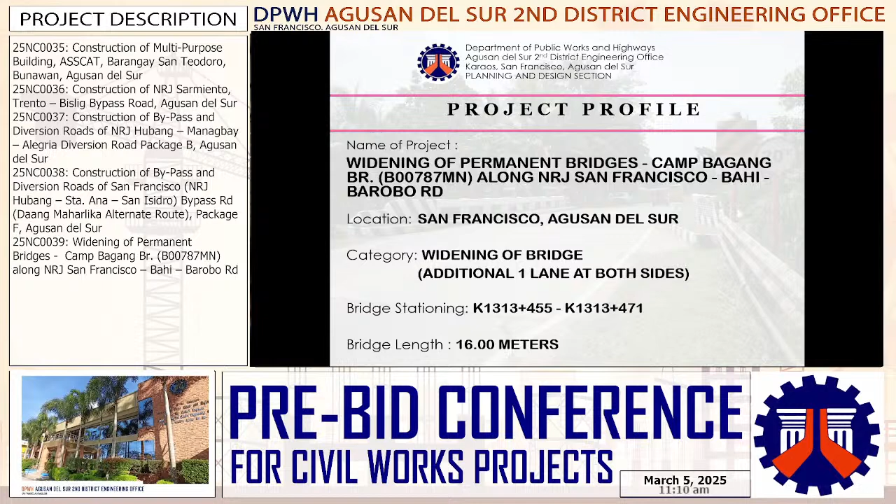Engineer Himo: Good morning, everyone. So our first project under pre-bid is the widening of permanent bridges, Camp Bagang Bridge, B00787MN along NRJ San Francisco Bahi Barobo Road, located at San Francisco, Agusan del Sur, under the category of widening of bridge, additional one lane at both sides. For the bridge stationing, we have kilometer 1313 plus 455 to kilometer 1313 plus 471, bridge length of 16 meters.

For the type of bridge, reinforced concrete deck girder or RCDG, number of span 1. Appropriation is 23,500,000 pesos. This is composed of CW, widening of bridge 23 million, and RROW of 500,000 pesos. ABC of 22,530,000 pesos, and a project duration of 219 calendar days.

So for the bridge profile of Bagang Bridge, it was constructed in year 1981, and it was repaired and rehabilitated in year 2014 under maintenance funds. So years in service for the Bagang Bridge is 44 years.

For the location map, this is the Bagang Bridge. This direction is going to Barobo, and this direction is going to SF Rotonda, this is the SF Rotonda. So for the geotag photos or actual photos on site, this is the beginning of the project and the end of the project.

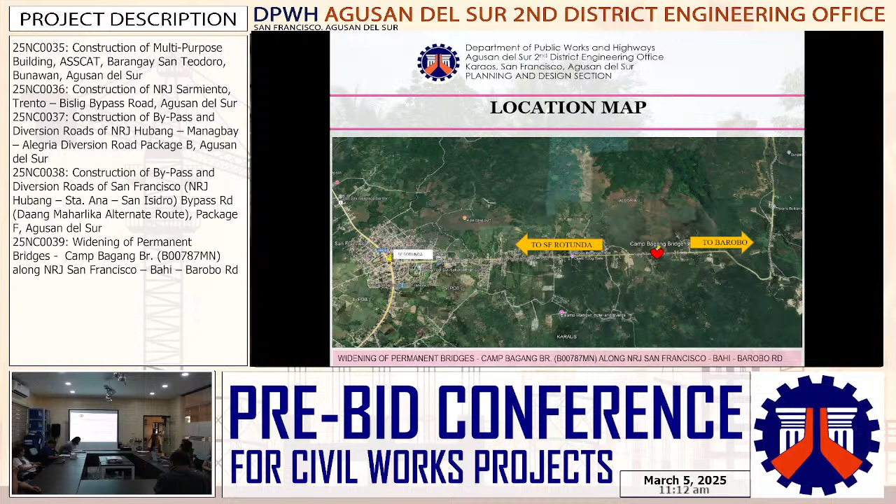For the closer look at the general plan, we have the existing bridge and our widening at both sides. Under the bridge, we have the RC bank protection with pile cap and steel sheet pile, SSP length of 3 meters, distance covered of 4.8 meters per abutment. The remaining arc length is RC bank protection with footing, dimension of 1 by 0.4, distance covered of 11.2, for abutment A and abutment B, and also the same for the upstream portion.

For the general elevation, we have our RCDG, 16 meters in length, girder height of 1.1 meters. We have the bottom of girder elevation, and our freeboard is 1.4.

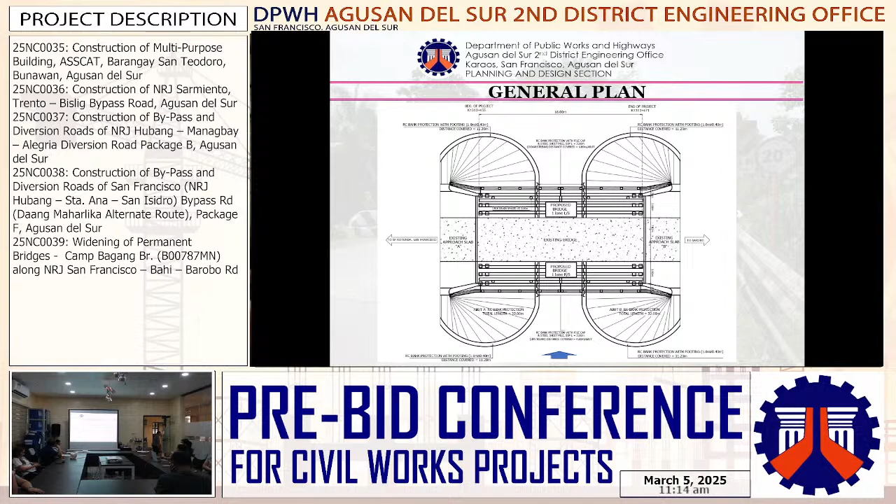For abutment A, we have to drive RC piles, 400 by 400, length of pile is 18 meters. Number of piles to be driven is 12 pieces, 6 pieces at each side, with allowable axial capacity of 831 kilonewton.

For abutment B, another 400 by 400 RC piles, length of 16 meters. Number of piles to be driven is 12 pieces, with allowable axial capacity of 1,519 kilonewton. This is based on the soil exploration result.

Under the bridge, we have the RC bank protection and pile cap, and also the steel sheet pile, length of 3 meters, distance covered of 9.6, for abutment A and also for abutment B.

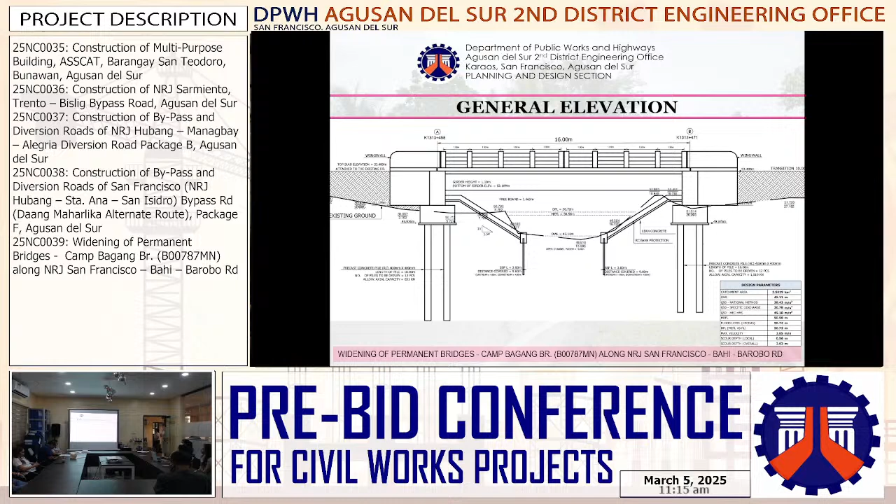For the typical cross-section of the bridge, we have the existing bridge of 7.32 and our widening of 3.66, and our sidewalk of 1.2. Total bridge width overall is 17.04 meters.

For the type of superstructure, span is 16 meters, girder type RCDG, girder depth or height of our girder is 1.1, and girder spacing of 1.45.

For the typical cross-section of bridge at approach slab, this is our existing bridge and existing abutment with a height of 2.391 meters from our previous standard. We have now the new standard height of 3.5 based on the new standard RCDG plan downloadable on the DPWH website, released last March 2019.

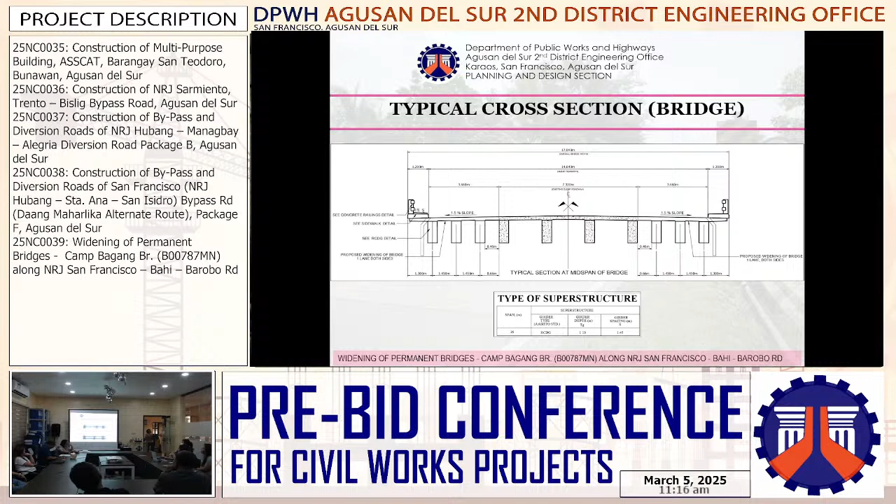For the superstructure detail, this is the orientation. Again, this is our existing RCDG bridge and widening at both sides.

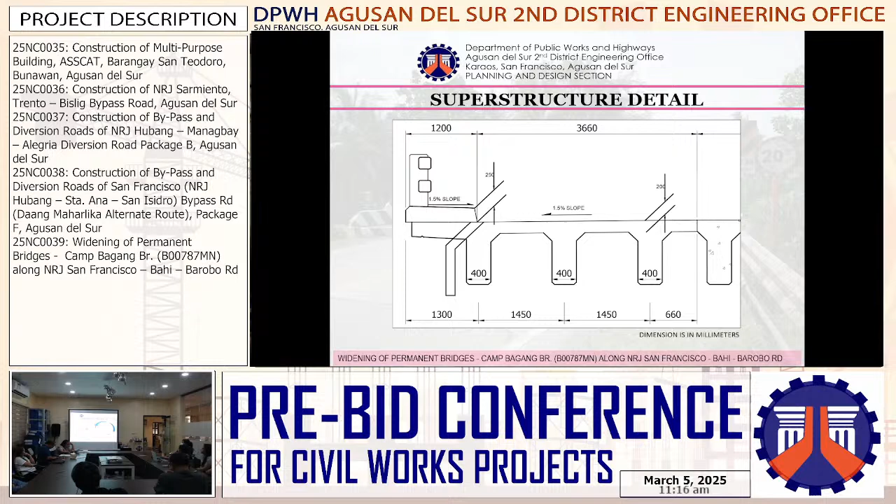For our connection, this is the existing bridge and this is our proposed widening. We'll have the groove and the expansion joint. For the longitudinal expansion, we have the angular steel with cover, and for the transverse expansion joint, we have the steel finger type.

For the expansion joint, our transverse will be the steel finger type with total length of 14.64 linear meters. For our longitudinal joint connection, we have angular steel with cover, total quantity of 1,032.24 kilograms.

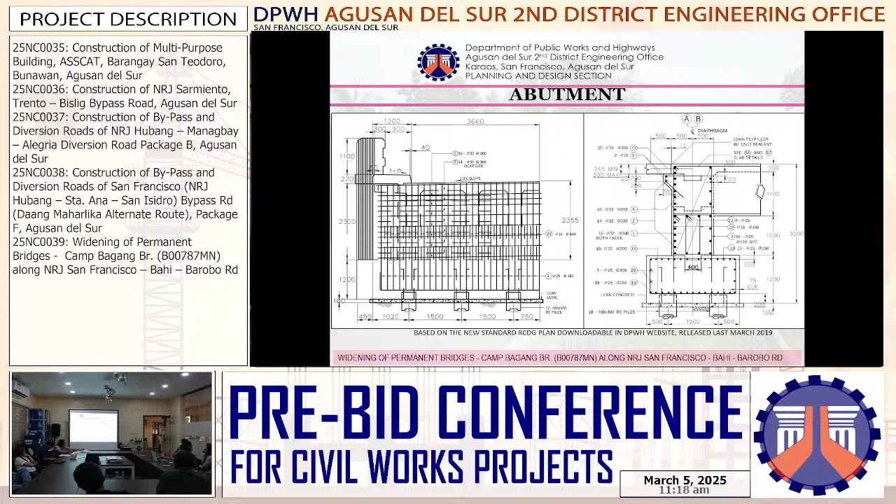For the steel sheet pile, length of 3 meters, distance covered of 9.6 per abutment. For the structural concrete, we have lean concrete 0.10 meter thick, and our reinforced concrete is 0.3 meter thick. Our steel sheet pile is FSP type 2 with section modulus of 876.

For the remaining arc length of our bank protection, it's the same, aside from the pile cap. Instead of the pile cap, we will replace it with footing, RC footing with dimension of 1 by 0.4.

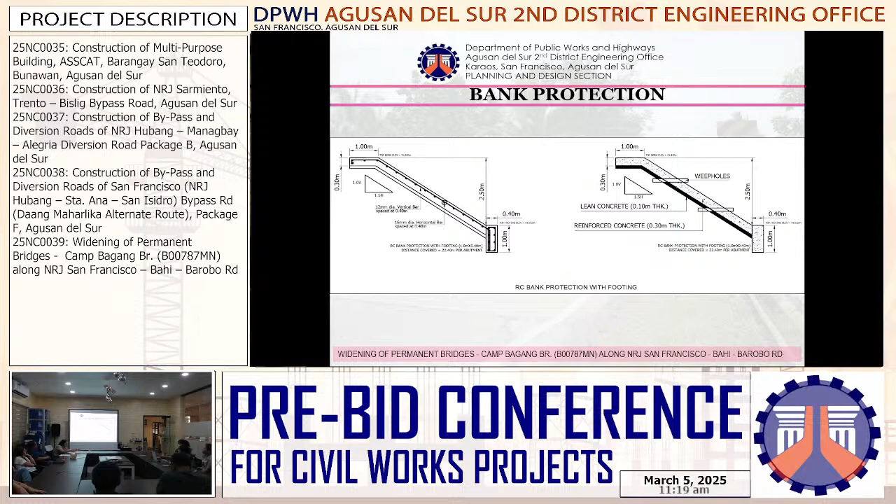So for the traffic management system, this is the orientation. This is based on the actual scheme on site. Originally, this is from Layout 7, Case 2, under DO 13 Series of 2018.

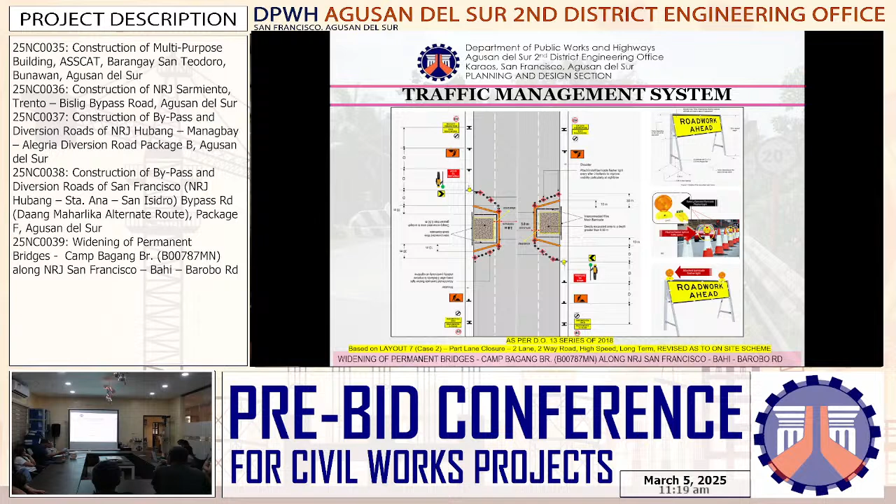For the program of work: facilities for the engineer and the bunk house, 1 lump sum. For the bridge survey and staking, 1 lump sum. For the project billboard signboard, 4 each. Occupational safety and health program, 1 lump sum. Traffic management, 1 lump sum. Move and demove, 1 lump sum.

For the earthworks, we have clearing and grubbing, 0.005 hectares. Removal of existing structures and obstructions. This is for the existing concrete to be removed, 39.38 cubic meters.

For the structure excavation, common soil, we have 102.2 cubic meters. For the embankment from borrow, common soil, we have 458.55 cubic meters. For item 200, we have 16 cubic meters, this is under the approach slab. And for our Portland cement concrete pavement, reinforced, 0.3 meter thick, for our new approach slabs, we have 80 square meters.

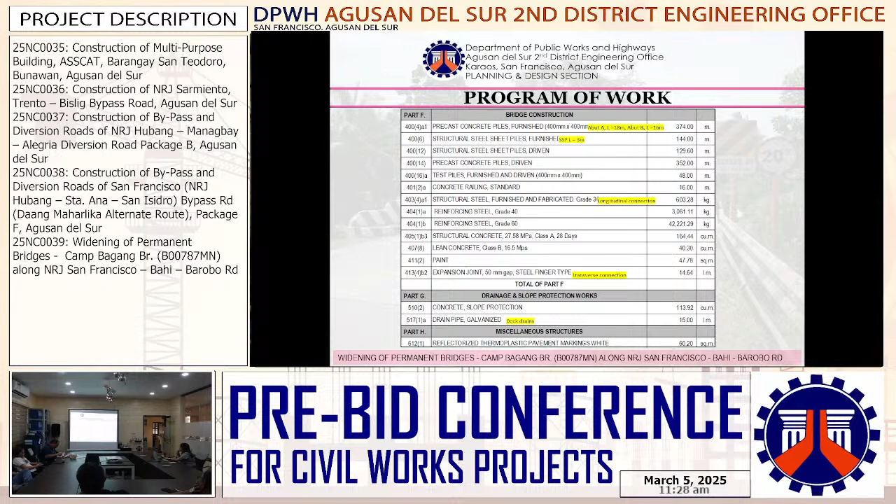So for the quarry sources, our embankment will be 5-kilometer radius away from our project site. Our item 200 is from Lapinigan, San Francisco, Agusan del Sur, with hauling distance of 18 kilometers.

Our sand will be from Patrocinio, Santa Josefa, Agusan del Sur, with hauling distance of 74 kilometers away from our project site. And our gravel, crushed, is from San Roque, Simulao River, Trento, Agusan del Sur, with hauling distance of 84 kilometers away from our project site.

For the minimum equipment requirement, we have bulldozer, 1 unit. For the dump truck, 2 units. For the payloader, backhoe with breaker, plate compactor, water truck, vibratory roller, we have 1 unit each.

For the transit mixer, 2 units. Concrete vibrator, 2 units. Concrete screeder, diesel hammer, drop hammer, 1 unit. And for the jackhammer, 2 units.

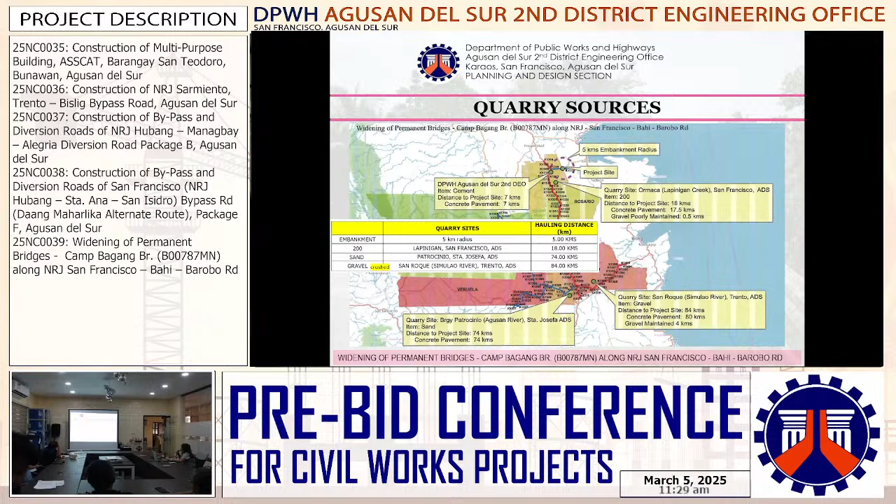For the cargo truck, 1 unit. For the truck mounted crane, kneading machine, applicator machine, motorized road grader, service crane, crawler crane with bucket, 1 bagger mixer, grout mixer, and vibro hammer, 1 unit. That's all, sir, for the widening of Bagang Bridge.

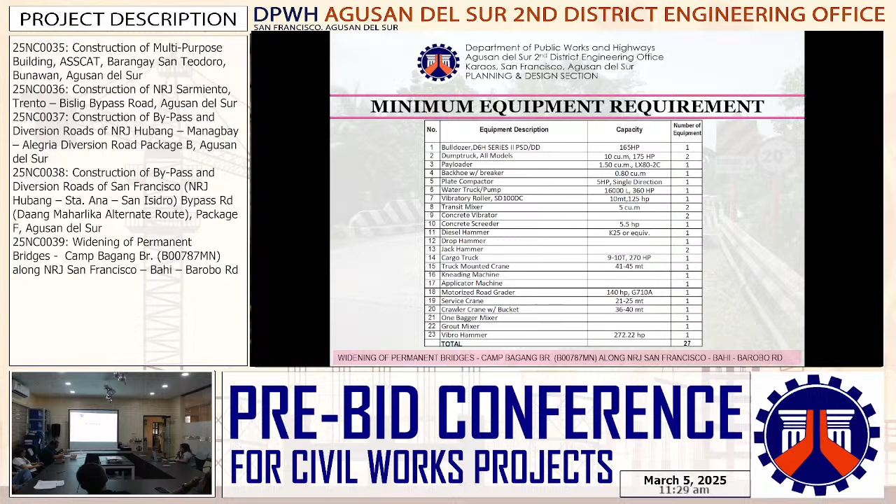We'll take questions or clarifications from the contractors or bidders present this morning regarding the presentation. If there's none, we'll proceed to the next project.

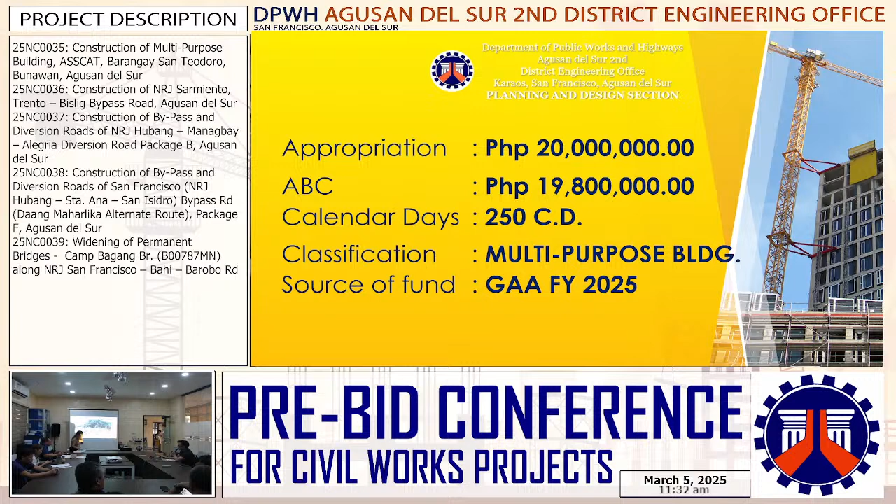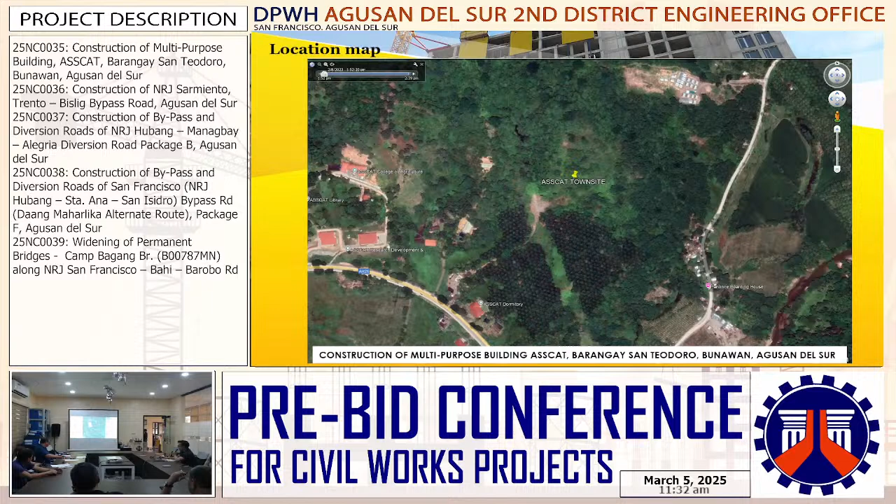And this is the proposed project location for the building.

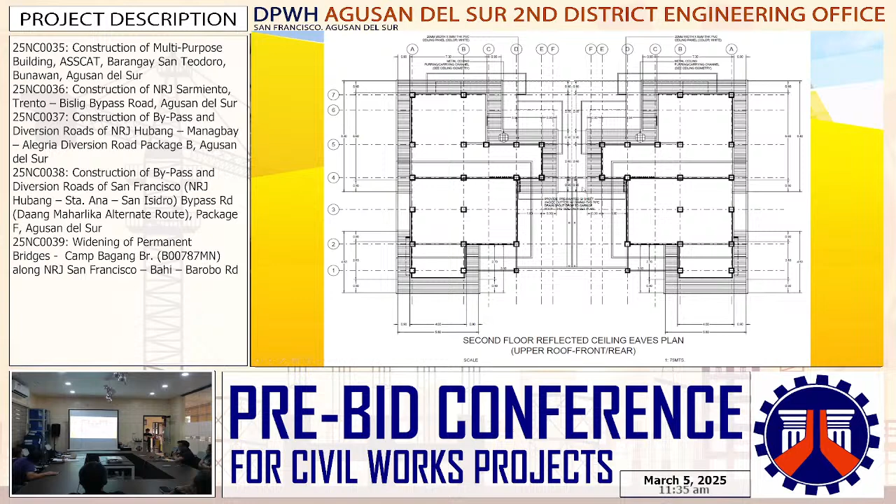This is the ceiling section for the cove ceiling and drop ceiling. And we also have a front elevation na nagamit og outdoor wall deco stone, finished ledgestone, textured surface, as well as aluminum cladding panels para sa patios and covered terrace.

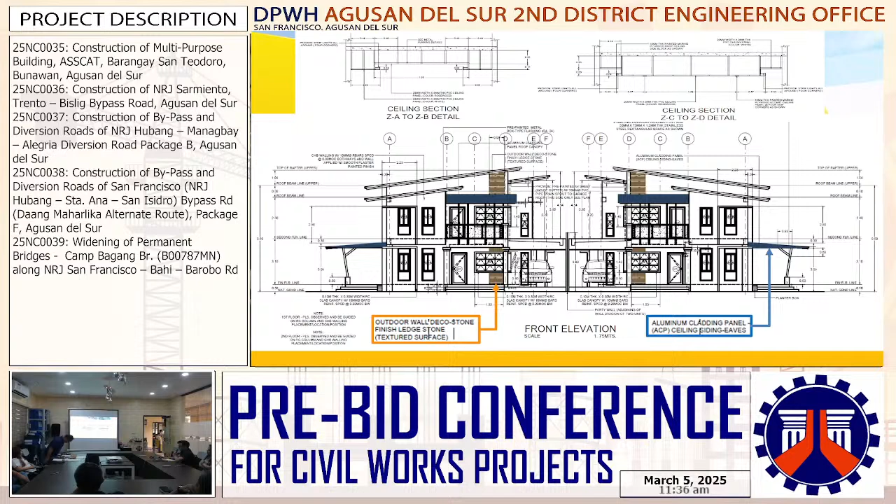For the right side elevation, aluminum cladding panels, ACP, ceiling siding eaves, and 25 mm thick wall-mounted U-groove RC molding, so plaster lang siya, plaster painted finish. For the cross-section details and longitudinal section details.

For the railings, we'll be using stainless steel na 304 for post, hand railings, and for the balusters. So different different sizes, but we will be using a stainless steel na grade 304.

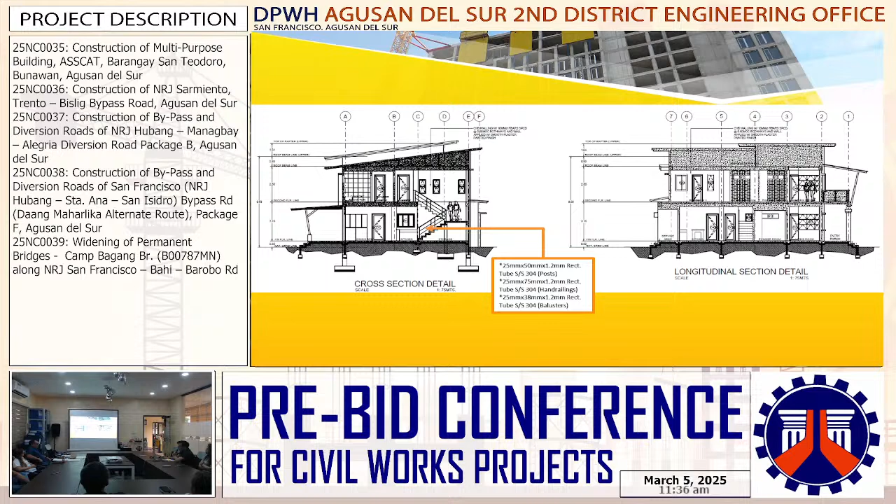For the left side elevation and the right side elevation, at right side elevation, deco stone and wall-mounted U-groove. For the left side, WPC fluted wall panels, finish color charcoal.

And for the roofing, we will be using a pre-painted metal sheet, rib type long span roofing above 0.47 mm, as well as a box type gutter gauge 24.

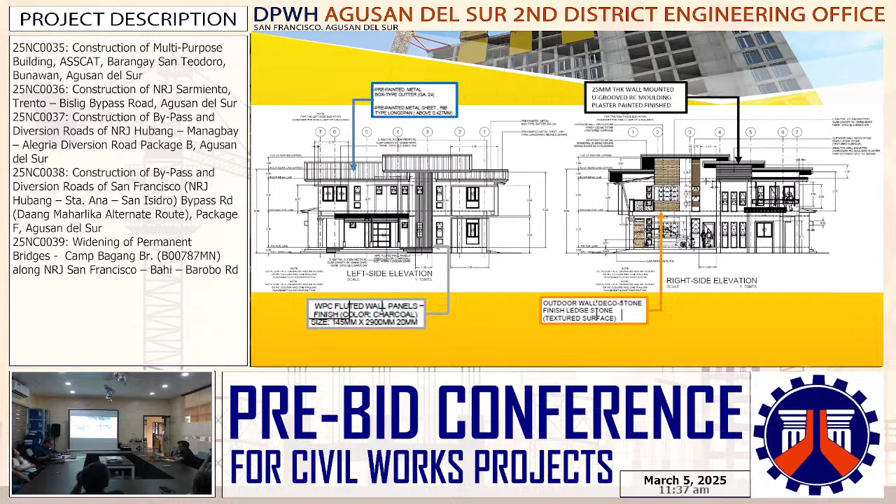For the roofing plan, same pre-painted metal sheet, rib type long span roofing, and in the mga sections sa roof. And we also have details for our modular wardrobe cabinets, additional detail, and as well as blow-up sections for our comfort rooms.

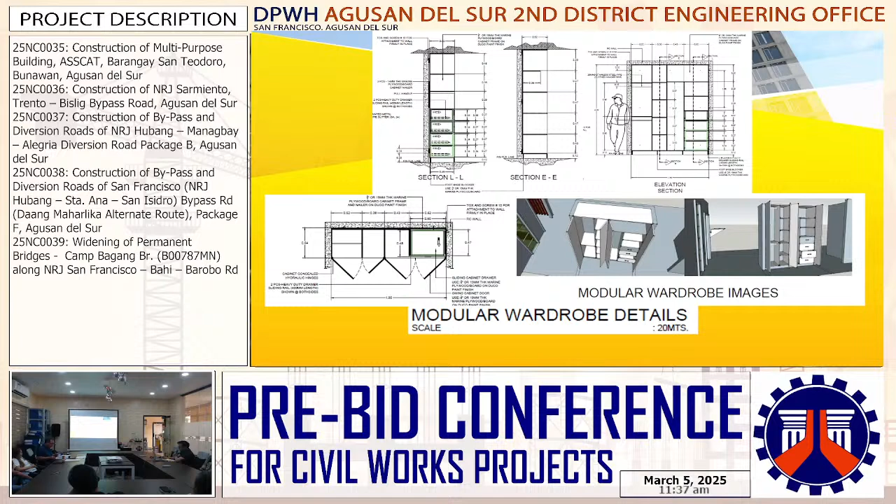Ground floor roof framing plan. We also have details for our ceilings and truss para sa carport. This is the second floor roof framing plan. Pre-painted metal sheet, long span, and then sa second floor, nagamit po tayo aluminum cladding para sa covered terrace.

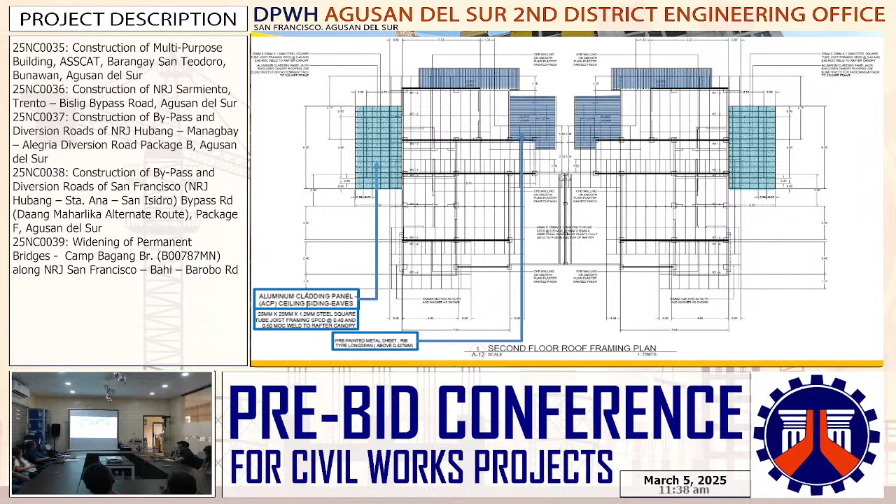This is the trusses. So we'll be using a double na 75 mm by 75 mm by 8 mm thick para sa top chord and bottom chord, and sa members is 50 mm by 50 mm by 3.5 mm thick. For the gusset plate, we'll be also using a 6 mm thick gusset plate.

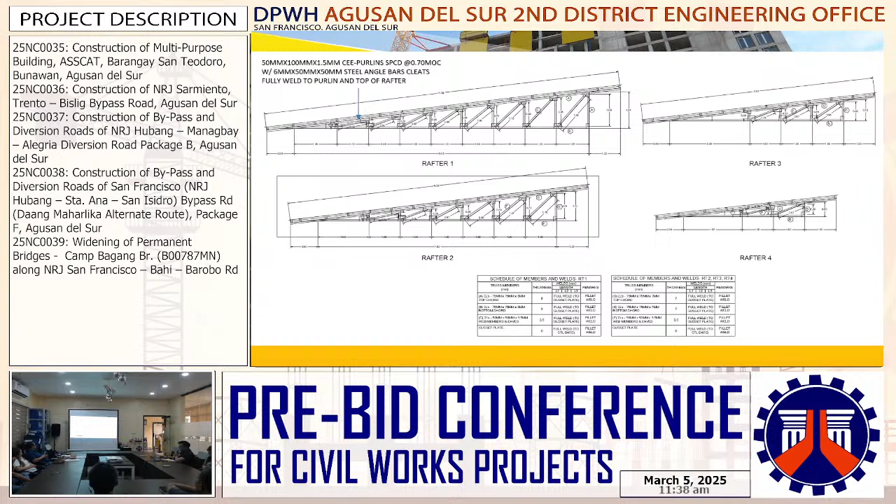And for purlins, 50 mm by 100 mm by 1.5 mm C purlins spaced as 0.7 meters at centers with 6 mm by 50 mm by 50 mm angle bars for cleats, fully welded to purlins and top of rafter. As well as different details para sa covered patios, for our rafters and fascia frames, and details for our covered terrace A na railings sa gawas and terrace B.

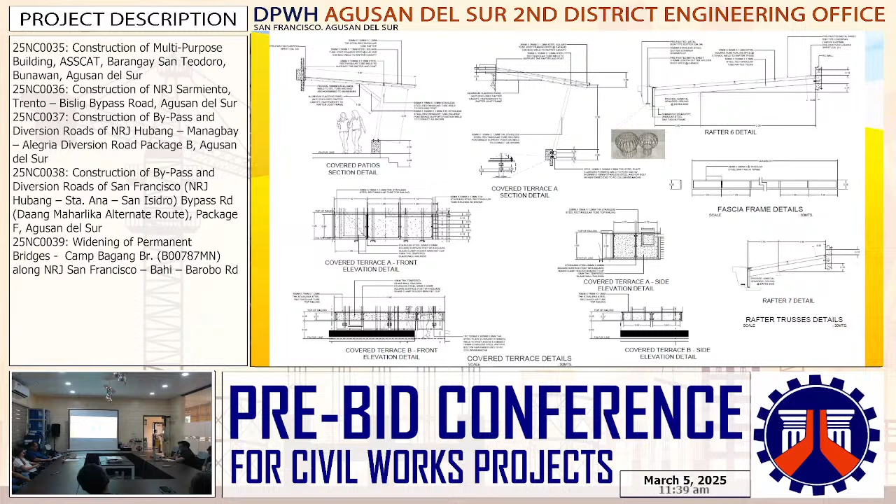Roofing plan for our carport. Same, we'll be also using a pre-painted metal sheet na red type roofing. And for the second floor roof framing plan is an aluminum cladding panel.

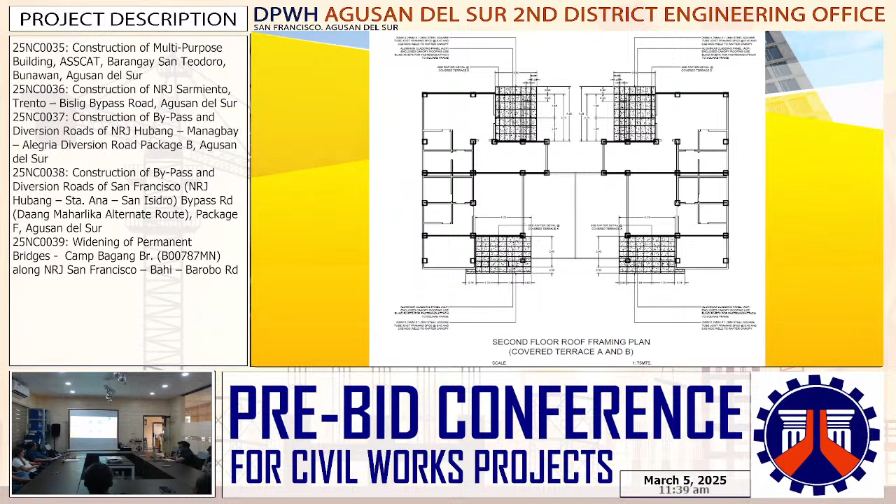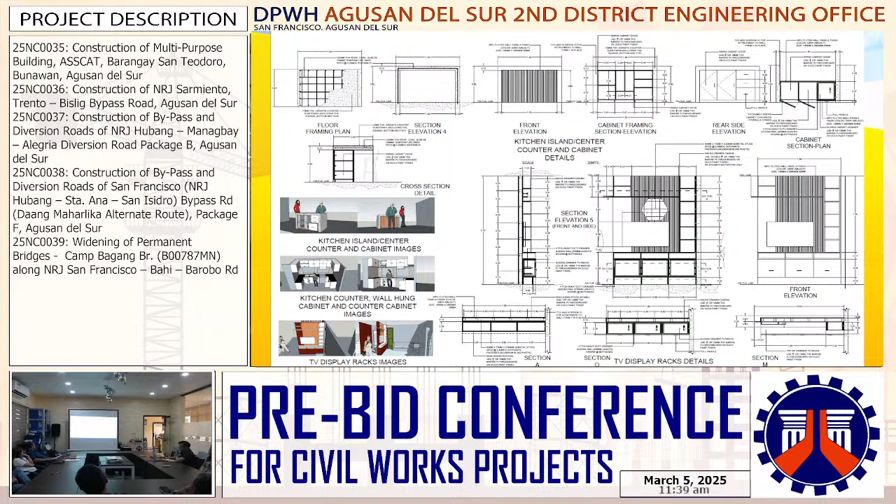And there are also different schedules para sa doors and windows and additional details. And atong schedule po para sa columns, as well as the elevations of each column, second floor roof beam layout, as well as ilang mga schedules. For the footing tie beam layout, with their corresponding schedules, and para sa stairs.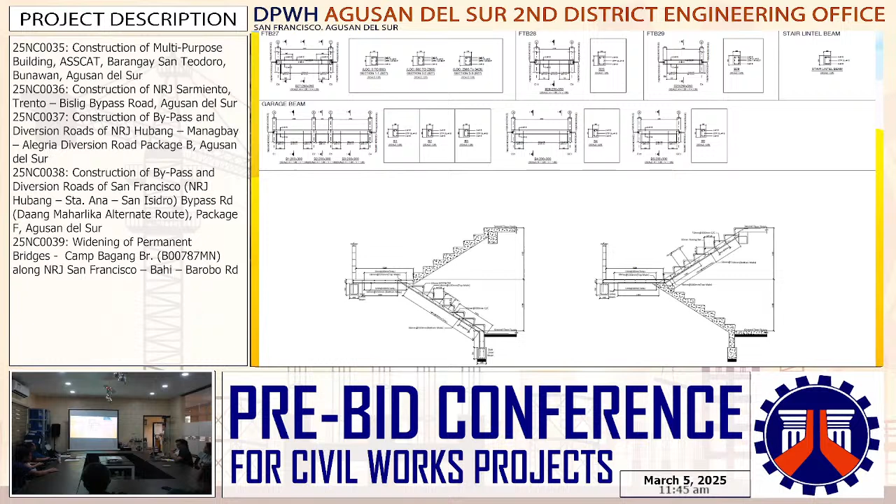So this is the roof beam layout plan as well as their schedules. For the foundation plan,

we updated the initial data we got from ASSCAT, and sadly, our foundations also increased. So last time, our program of works included the old water system, water pumping system, but

due to the changes, that item has been omitted. For this typical column and footing details with isolated footing, we have 2.15 by 2.15 by 0.3, reinforced with 12, 16mm diameter bars both ways, up to isolated footing 6,

with their corresponding reinforcements. We also have footings for the pedestal footings on our patios and concrete gutter details. Aside from the isolated footing, we also have combined footing where columns are close together.

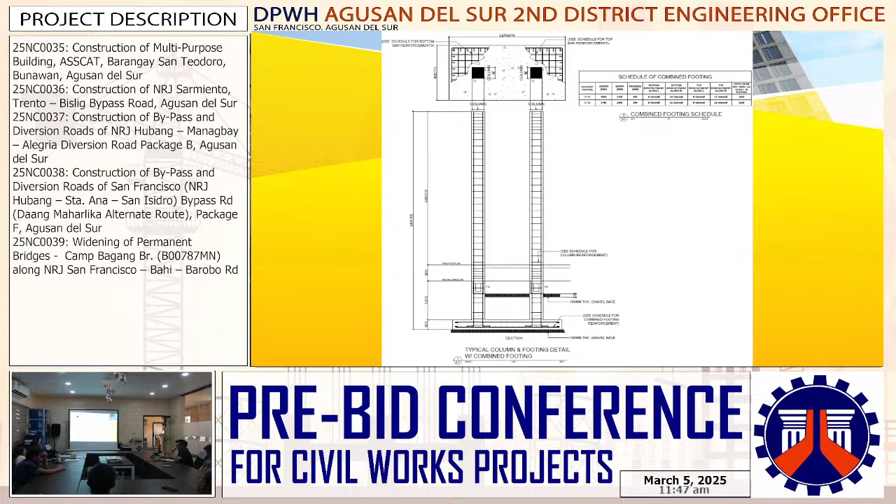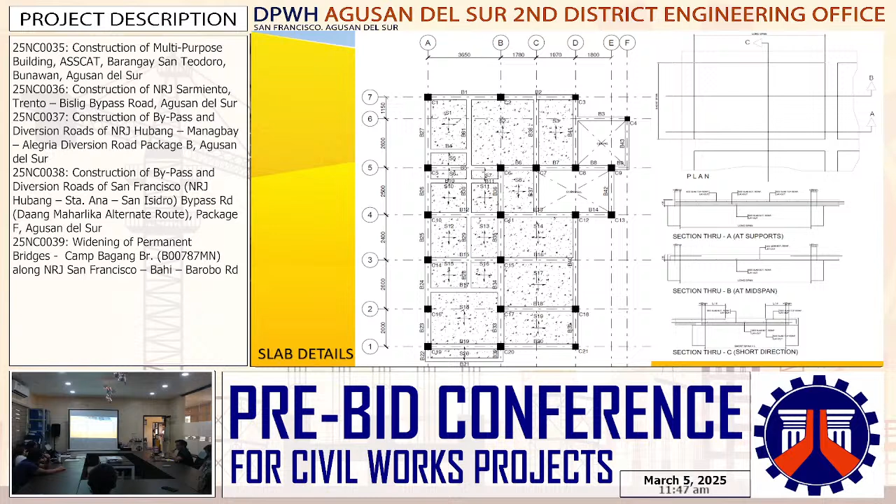These are also the slab details as well as the sections and their corresponding schedules. This is a typical detail for our billboard.

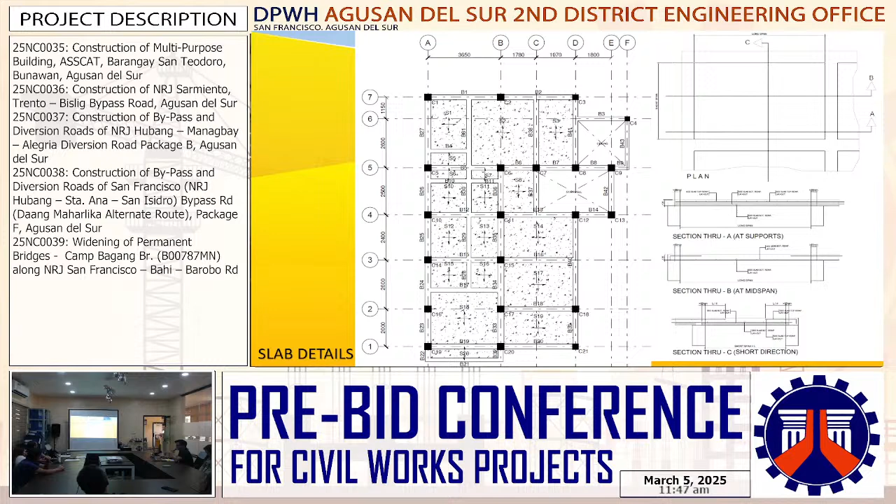And let's proceed with the program of works. Permit and clearances, 1 lump sum. Project billboard and signboard, 2 each. Occupational safety and health as well as mobilization and demobilization, 1 lump sum.

For the earthworks, clearing and grubbing, 414 square meters. For structural excavation common soil, 372 cubic meters. For the embankment from roadway or structure excavation, 234 cubic meters. Gravel fill, 59 cubic meters.

Reinforced concrete, structural concrete, class A, 28 days, 217.8 cubic meters. For the reinforcing steel deformed grade 40, 31,422.77 kilograms. Formworks and falseworks,

829.03 square meters. For the finishings and other civil works, concrete gutter, 13.6 meters. Sewer line works, storm drainage and downspout, septic vault, plumbing works and cold water lines, 1 lump sum.

For the pre-painted metal panel on metal frame ceiling, 163.38 square meters. Carpentry and joinery works as well as finishing hardware, 1 lump sum.

Aluminum frame glass doors, sliding type, 8.4 square meters. Aluminum glass windows, 1 lump sum. Frames, jambs, seals, heads, transom and mullions, 38 sets.

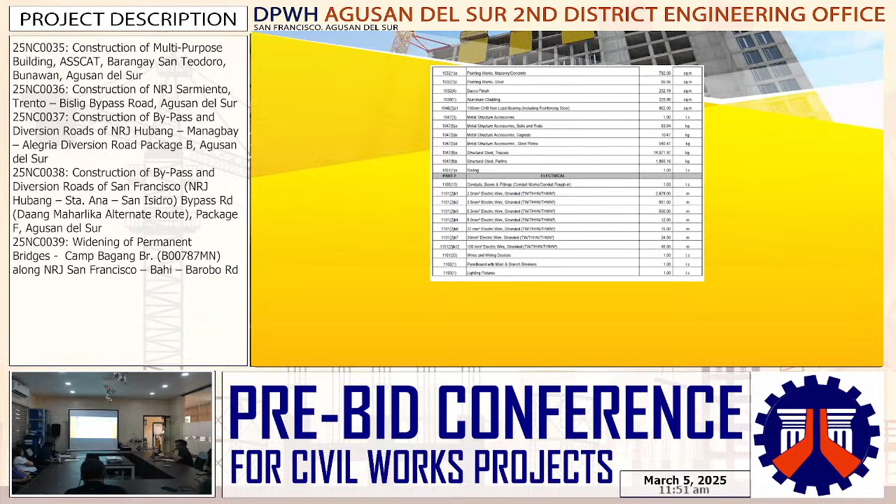For the minimum equipment requirement: plate compactor, 1 unit. Concrete vibrator, 1 unit. Bagger mixer. Bar cutter and bar bender, 1 unit. Welding machine, 2 units. Cutting outfit, 1 unit. Backhoe, 1 unit. Dump truck, 2 units.

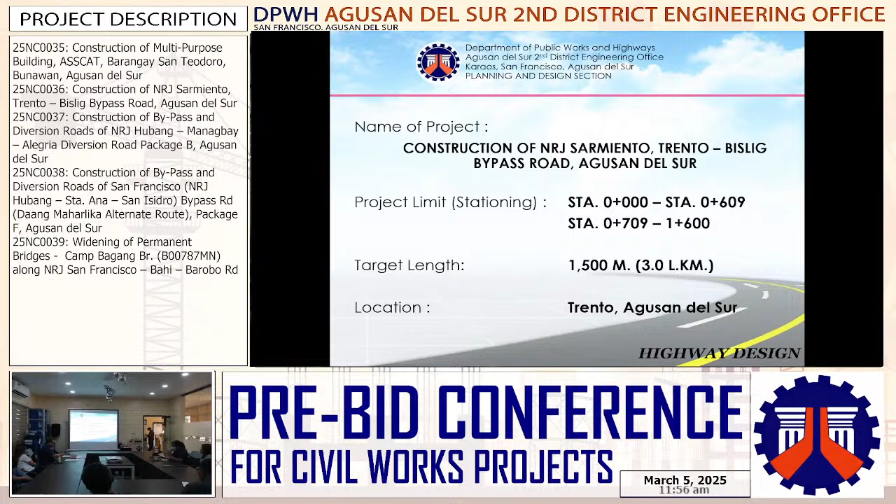Good morning everyone. This is the previous presentation for the project named Construction of NRJ Sarmiento Trento to Bislig Bypass Road, Agusan del Sur, with project limit station 0+00 to station 0+609 and station 0+709 to 1+600, with a target length of 1,500 meters or 3 linear kilometers, located at Trento, Agusan del Sur. The project has an appropriation of 50 million pesos, an ABC of 49 million pesos, a project duration of 178 calendar days, source of fund NEP 2025.

This is the location map and the geotag photos. This is the photo at station 0+00.

Before the bridge at station 0+609. After the bridge, station 0+709, and at the end, station 1+600.

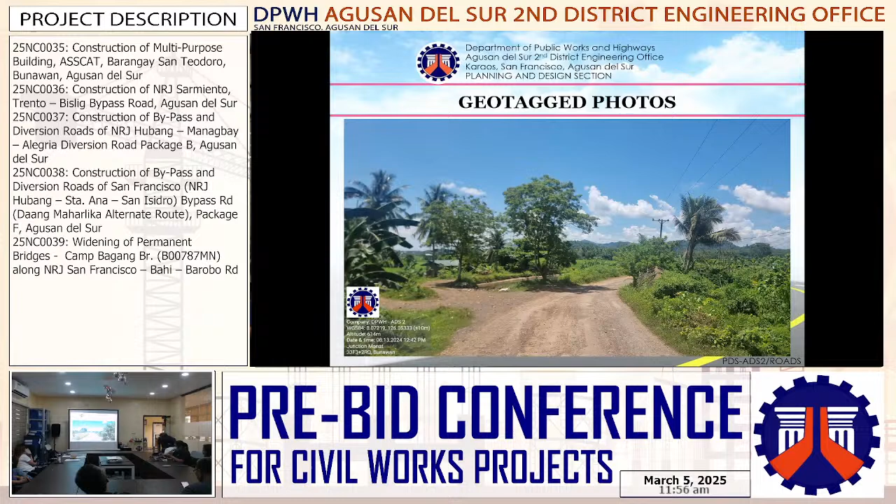For the typical section, we will provide a 1.5 meter width shoulder, 150 millimeter thick, and a 3.35 meter width for the carriageway, 0.280 meter thick. For the typical section for high embankment, same as before, but we will also provide a grouted riprap of 300 millimeter thick. We will provide a grouted riprap at station 0+080 to 0+320 and 0+440 to 0+580 right side only, and 0+709 to 0+720 both sides.

So for the topographic plan and profile, this is the TP for before the bridge, station 0+00 to station 0+609. At station 0+93.78, we will extend the existing NIA siphon, 2.4 by 2.4 by 5 meter length area RCBC.

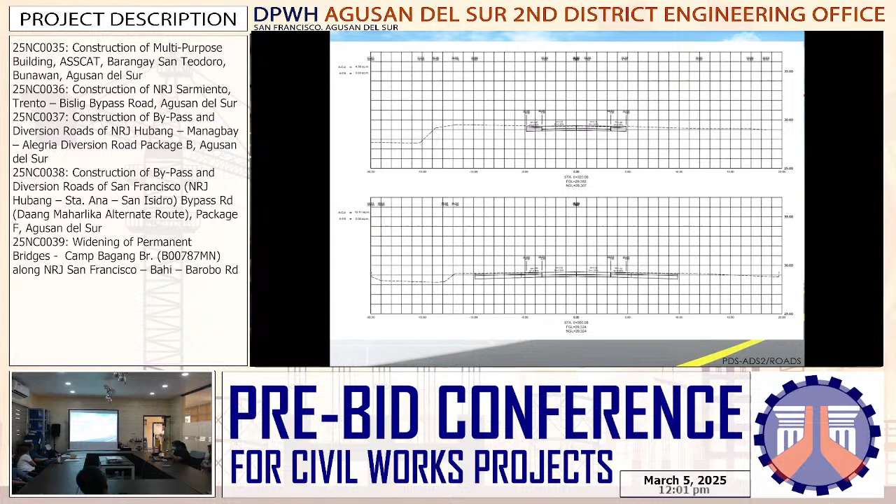For other general requirements: construction survey and staking, 1.5 kilometers. Culvert survey and staking, 5 each. Project billboard or signboard, 4 each. Occupational safety and health program, 1 lump sum. Traffic management, 1 lump sum. Mobilization and demobilization, 1 lump sum.

For the earthworks: clearing and grubbing, 2.12 hectares. Structure excavation common soil, 149.48 cubic meters. Embankment from roadway or structure excavation common soil, 2,472.02 cubic meters. Embankment from borrow, 901.77 cubic meters. And subgrade preparation.

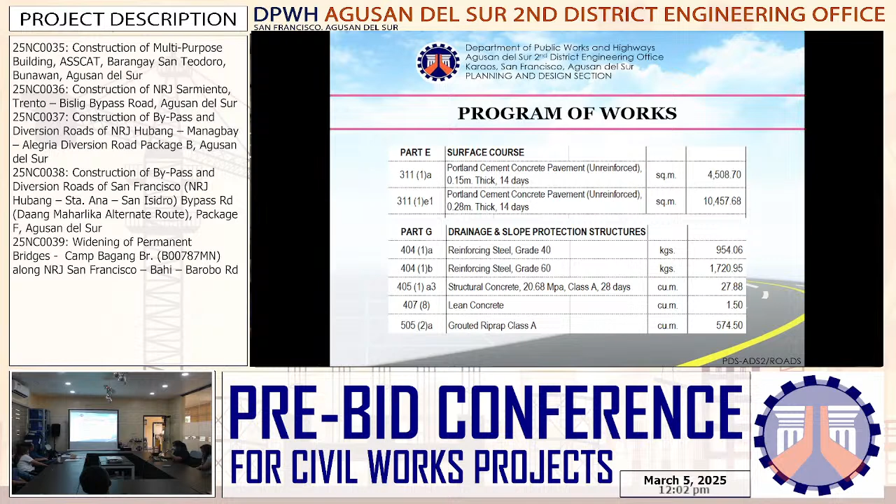18,283.13 square meters. For subbase and base course: aggregate subbase course, 4,283.18 cubic meters. For surface course: PCCP 0.15 meter thick, 4,508.70 square meters; PCCP 0.28 meter thick, 14 days, 10,457.68 square meters. For drainage and slope protection structures: reinforcing steel grade 40, 954 kilograms.

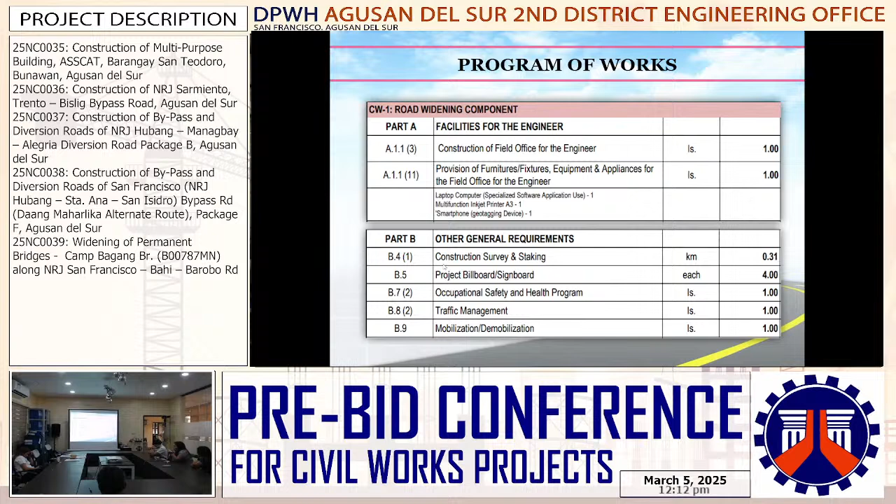And for item 200, we have 698.09 cubic meters. Still for the road widening component: gravel surface course for the fillet section, 14.27 cubic meters. PCCP unreinforced 0.15 meter thick, 799 square meters. PCCP unreinforced 0.28 meter thick, 2,077 square meters. And for the drainage and slope protection structures, for the retaining wall: reinforcing steel.

For the drainage, reinforcing steel grade 40 with 4,936.84 kilograms, structural concrete 20.68 MPa with 114.54 cubic meters, and stone masonry with 1,883.06 cubic meters. And for the miscellaneous structures for the widening component, we have reflectorized thermoplastic pavement markings, white, with 114.65 square meters.

And for the CW2 road construction component: construction survey and staking, 0.15 kilometer. Clearing and grubbing, 0.24 hectares. Embankment from roadway excavation, 17.31 cubic meters. Embankment from borrow, 436.47 cubic meters. Subgrade preparation, 134 square meters. Item 200, 196.98 cubic meters. And PCCP unreinforced 0.28 meter thick, 984.9 square meters.

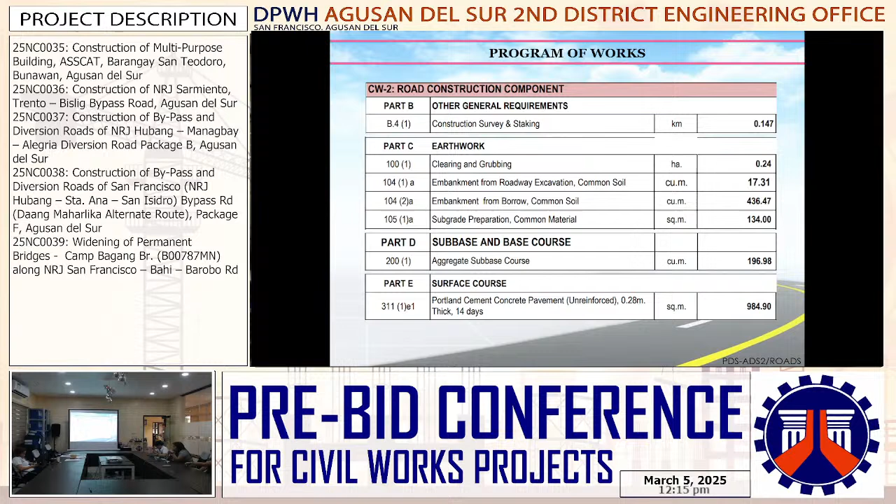So, you may proceed for the next project.

So, how are you doing?

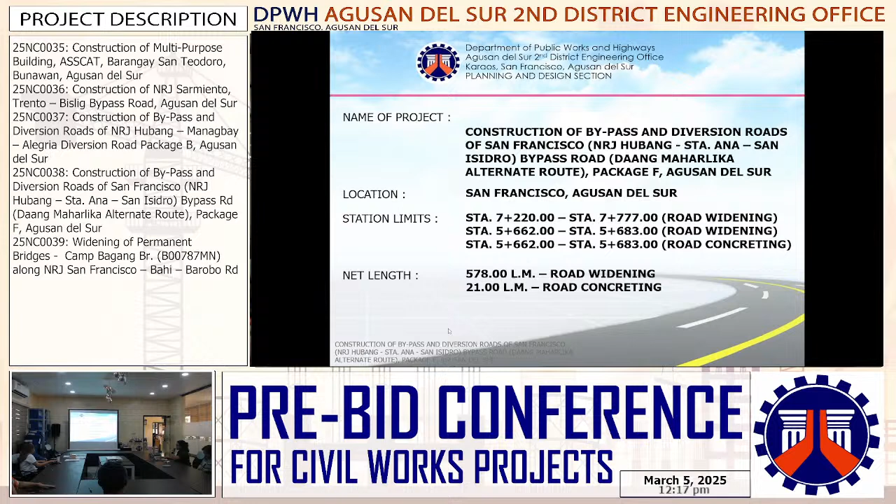Bypass and diversion roads of San Francisco NRJ Hubang to Santa Ana to San Isidro Bypass Road, Daang Maharlika alternate route, package F, Agusan del Sur at San Francisco, Agusan del Sur, with station limit 7 plus 220 to 7 plus 777 for the road widening, and another section 5 plus 662 to 5 plus 683 road widening included in road concreting, with net length 578 linear meters for the road widening and 21 linear meters for the road concreting. For the original plan and program of works, appropriation is 30 million, ABC of 28,950,000.

Calendar days to complete this project is 191. Classification: road concreting and road widening under GAA FY 2025.

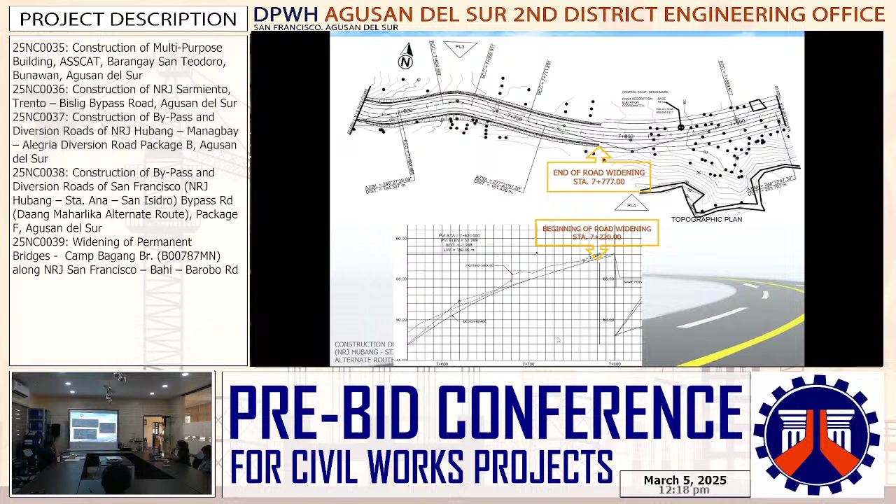So the typical section is 3.35 meter carriageway on both sides and 2 meter shoulder. Typical section for the cut section includes installation of ditch. For the fill section, provision of retaining wall on both sides using stone masonry. These are the details for the stone masonry railing and stone masonry walls.

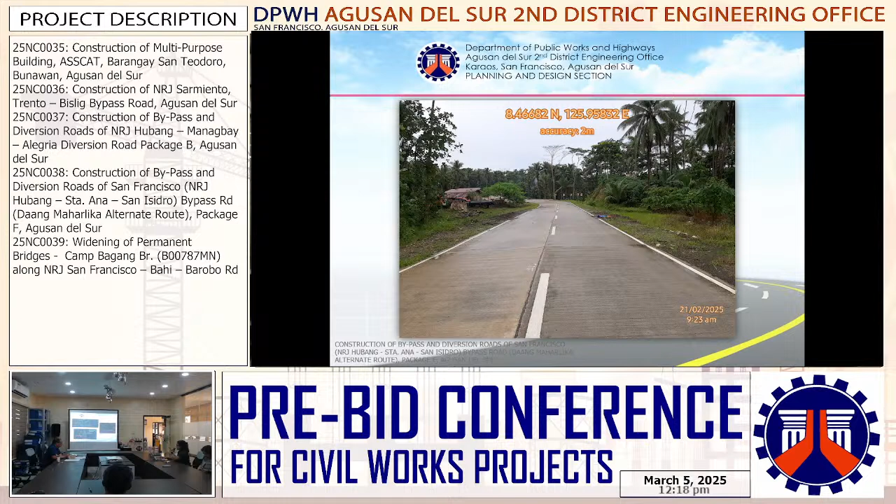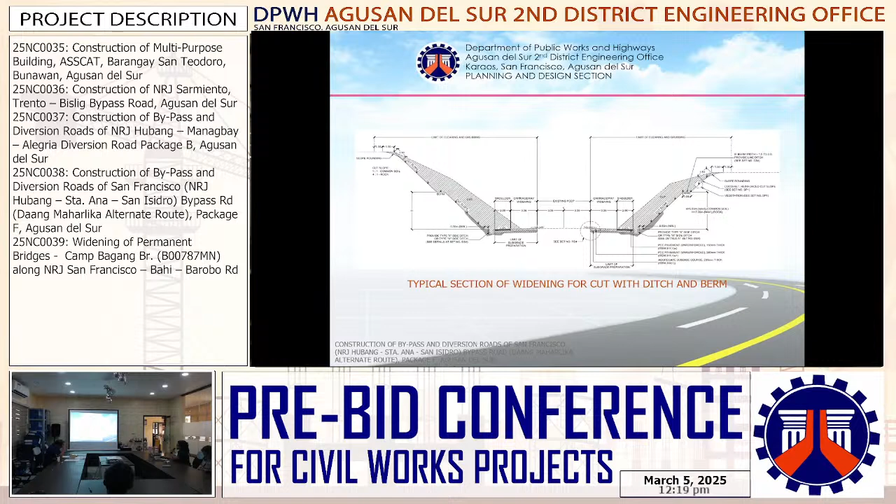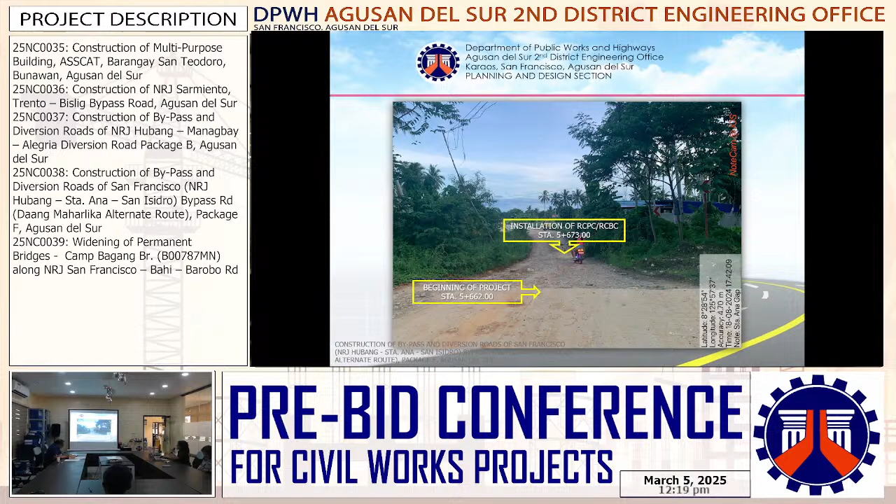For the side ditch, dimension is 600 by 700 mm. For the road concreting area, plan and profile, installation of cross drainage. For the photographs taken at the area, beginning of the road concreting, installation of RCPC, and then the end section. This photo was taken yesterday during the heavy rain to show the flow of water.

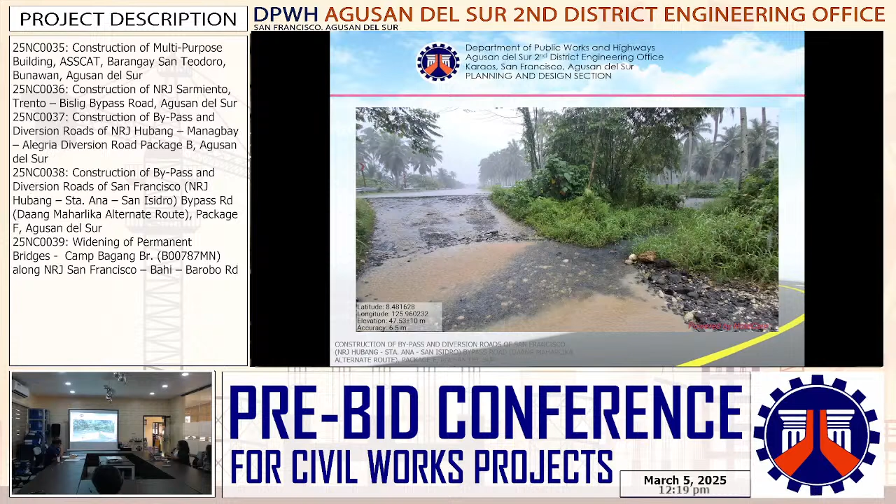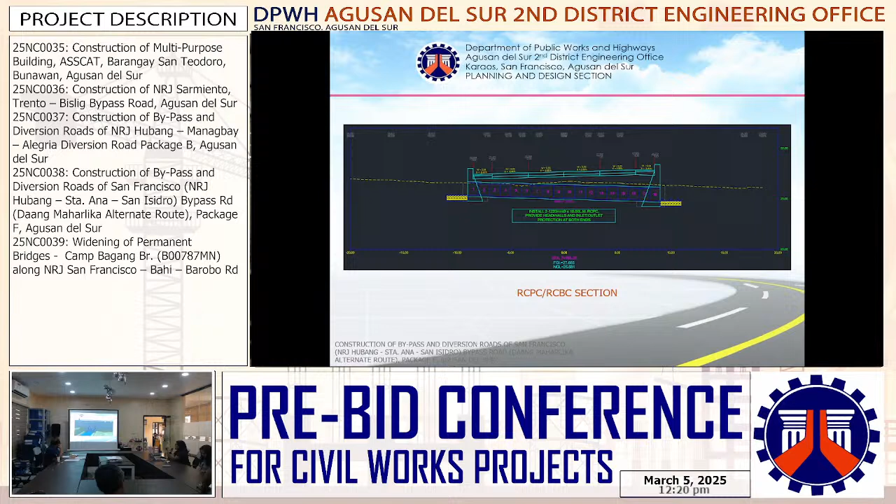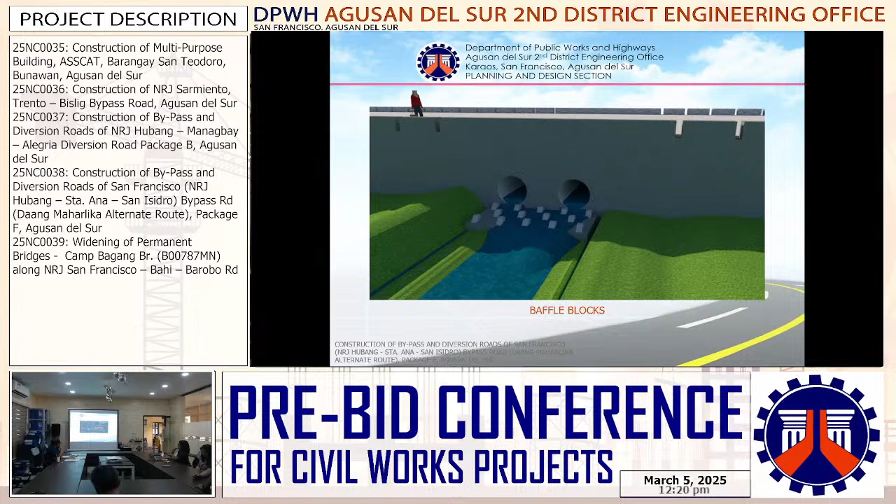For the program of works, facilities for the engineer: provision of field office for the engineer on rental basis for 7 months, provision of furniture, fixtures, equipment, and appliances for the field office. One lump sum includes 1 smartphone for GIS or geotagging purposes.

Other general requirements: construction survey and staking 0.58 kilometers, culvert survey and staking for each, project billboard for each, occupational safety and health 1 lump sum, traffic management 1 lump sum, mobilization and demobilization 1 lump sum.

For the earthworks: clearing and grubbing 1.11 hectares, removal of existing guardrails 544 linear meters, removal of existing guardrail posts 136 each, removal of existing road signs 5 each, surplus common excavation 5,673.69 cubic meters, structure excavation.

459.24 cubic meters, foundation fill 74.05 cubic meters, pipe culvert and drain excavation 12.18 cubic meters, embankment from roadway or structure excavation, common soil 1,601.48 cubic meters, subgrade preparation 8,060.35 square meters, and subbase and base course, aggregate subbase course.

1,236.92 cubic meters. For the surface course, PCCP of 0.15 meters deep, 2,312 square meters. Portland PCCP of 0.28 meters deep, and for the drainage and slope protection structures, reinforcing steel grade 40, 7,961.74.

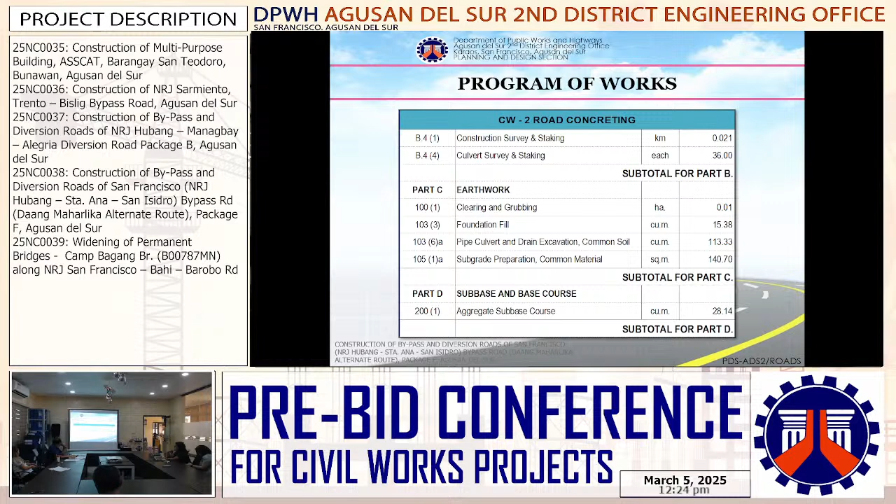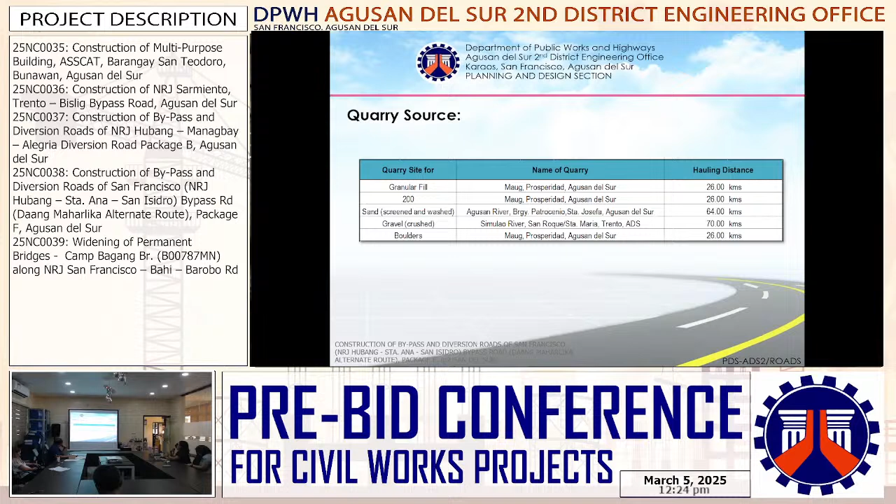For the quarry source, granular fill item 200 and boulders will be taken from Maug, Prosperidad, Agusan del Sur, and sand will be taken from Agusan River, Barangay Patrocinio, and gravel from Simulao River, San Roque, Trento, Agusan del Sur. That's all for this project.

Okay, thank you. Do you have any clarification for the contractors or the bidders? Since we have no bidders wanting to hear from us in this pre-bid conference regarding the requirements for the bidding documents, as well as the documents to be submitted by the bidders, I think since we have none, let's proceed.

Since we passed it to 12 o'clock. How about the bidding schedule, Vice? After 12 days, 19?

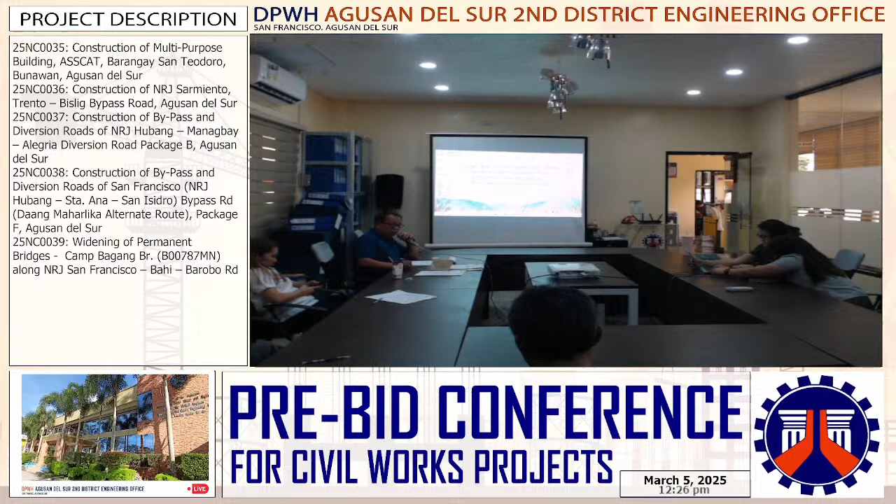This pre-bid conference, of course, is for bidders who want to hear from us regarding the requirements of the bidding documents and the documents to be submitted by the bidders. So to all BAC members, TWG members, as well as the secretariat.